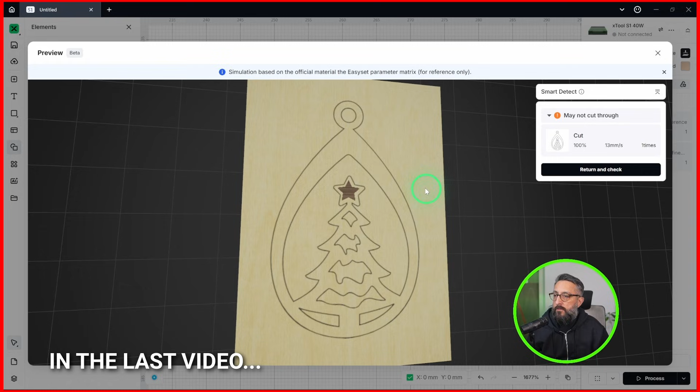In the last video, we walked through everything Studio gives you inside the software. That video was already getting a little too long because there's a lot to see and things in Studio keep changing so fast, so it was worth slowing down to show you what was new while it was still fresh. Give that a watch when you have a moment, because it sets the stage for what we're doing here today.

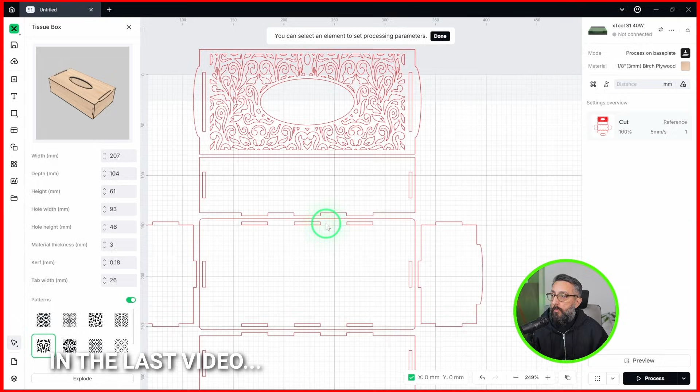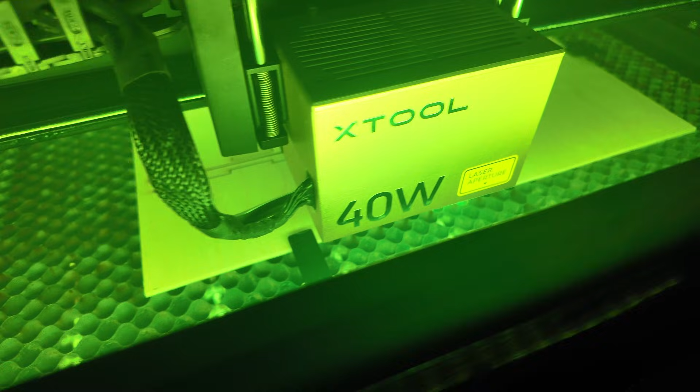As you can see, we're in the garage today. This is where the designs actually leave the screen and turn into real cuts. I'm going to take you through the full workflow from start to finish. We're going to prepare some plywood, measure twice of course, and then send everything to the laser. We're going to make a couple of products using the templates and taking the defaults, just so you can see how easy it is to go from there to the laser.

I will show you the treasure box, some of those keychains I made a couple of weeks ago, and prepare some ornaments and a quick tissue box. This is just to show you the variety of products in the studio, and also so you can see how quick things actually go. You will see how fast the design comes together once you plug in the numbers in the studio, and then we're gonna let the generators do the actual heavy lifting.

Let's get started. So I got my plywood ready. I'm just going to lightly sand with this sanding sponge here, just to make it look a little nicer. This is 3.2 millimeter Baltic birch, not the most straight. We'll see what we get out of it. We're just testing. Don't forget, never trust plywood. Use a digital caliper, whatever way you can to get a bit of an exact reading.

So for our purpose, I just wanted to show you how quick it is to make this product. This is what I'm calling a 5-minute product. You just go to the applications menu and then go to the box generator. That's simple. I know that I want to do the tissue paper. I'm basically going to take the default 3.2 millimeter thickness for the material. That's all I'm going to change.

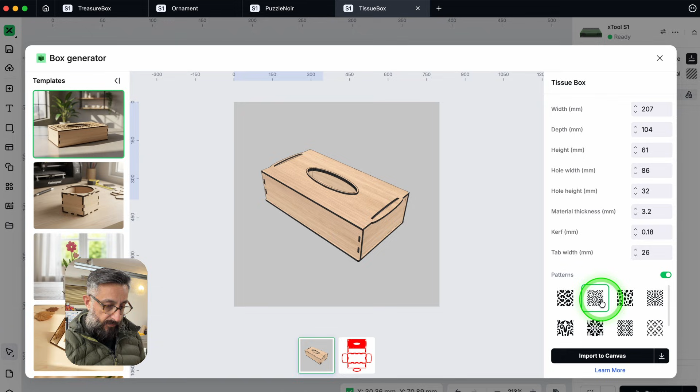I'm going to pick one of these guys for my design. I will import into the canvas. Remember, I can still change the design here within the canvas. We're going to close out of here, the tissue box template portion of things.

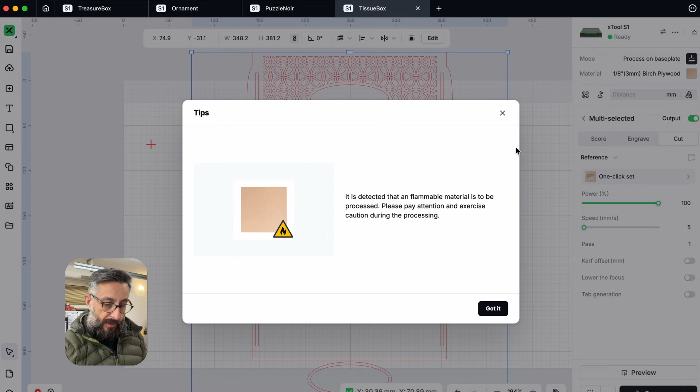As far as the cut, we're going to go with the 3 millimeter birch plywood, and then click apply. The system is smart enough to know I'm working with the S1, so it gives me its recommended settings, and that's basically it because all we're doing is cutting.

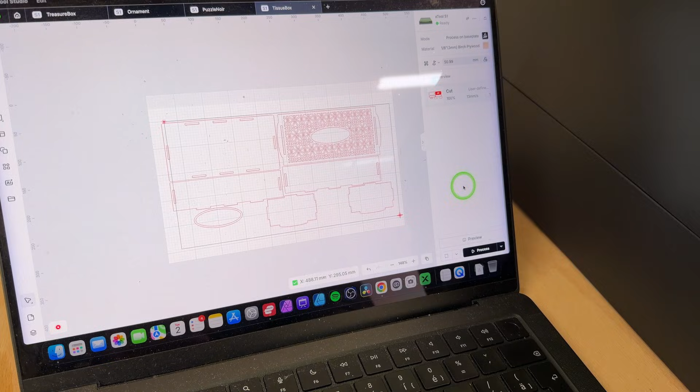So what we're going to do is set up the cuts, 1, 1, 3, and 3. This guy is 24.4 by 46.4. Let's see if we can film with one hand and set it up with the other. All right, so there it is. What is the estimate right now? 17 minutes. Now we have things centered.

Let's do our framing, let's see how we're doing. We're gonna check where those magnets are when it comes to the design. All right, I'm satisfied where things are going to cut. So 17 minutes, let's give it a try.

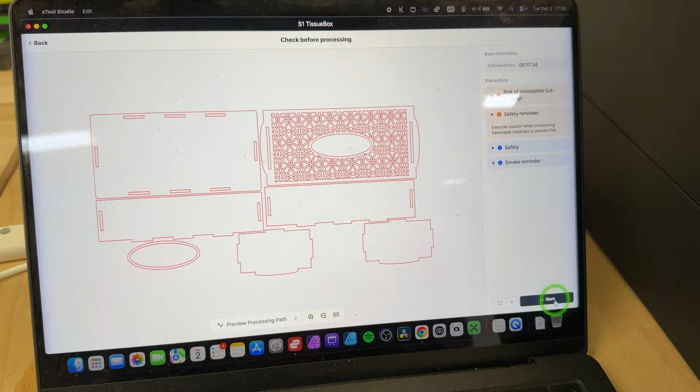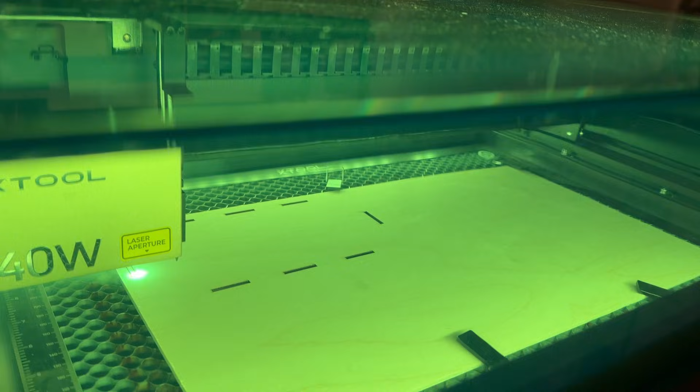A lot of smoke, as you can see. This plywood is probably not the best of qualities, but it works very well for my testings. Oh, that's nice. This was 5 when it came to speed, 100% power. Is it gonna hit the magnet?

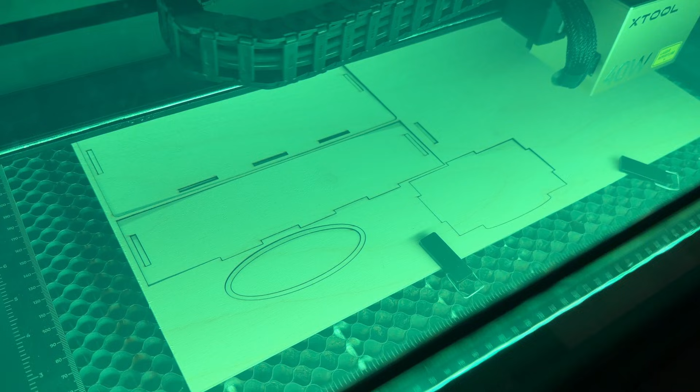Nope. All right, so what did we do? In a matter of minutes, just a couple of clicks here and there, you can technically design an entire box within Studio in just a couple of clicks. Of course, if you're going to customize it further, it will take you longer. But what we're trying to demonstrate here is if you need a quick gift, or if you need to sell something quick that you can customize quick, everything is quick. You go into Studio, a couple of clicks, and you're done.

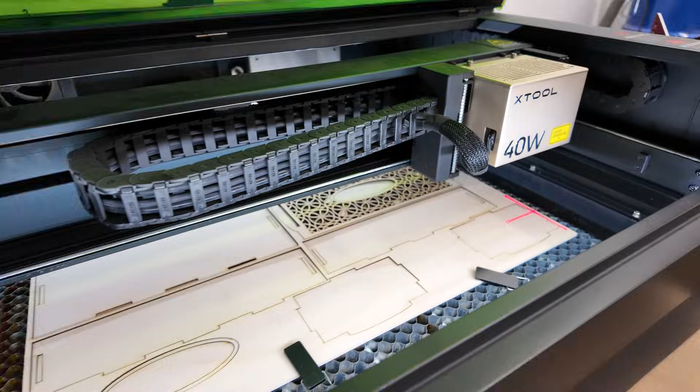Beautiful. Let's take a look. Look at that.

Of course, you should probably use some masking tape, and of course I should have done a bit of maintenance before cutting. All that will help you get nicer quality cuts.

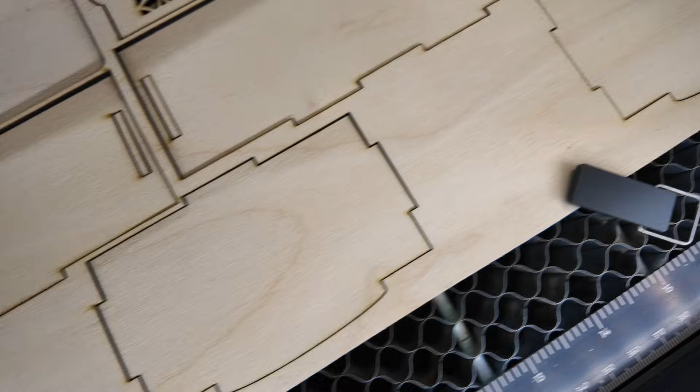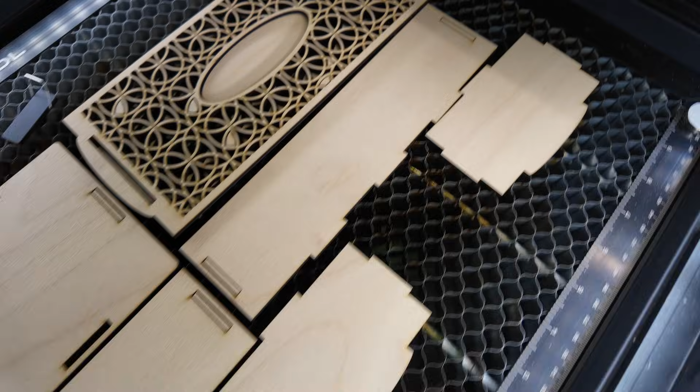The plywood not being the best, now you know why my honeycomb looks like it does. Whoa. So yes, that went pretty good.

Challenge is going to be putting it together. Do you have any tips as to how to glue this, put it together nicely? If you do, please let me know.

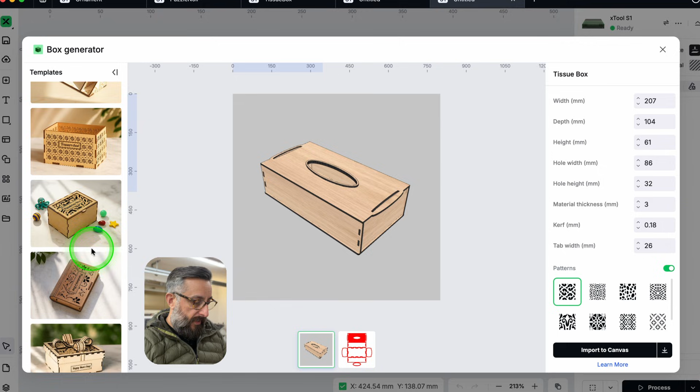Alrighty, so we're gonna go back to the applications menu, box generator. That's where we are going to live. We did the tissue box, and now we're going to make the one that they call the book box.

I really like this one. It's got a lot of patterns here, so you can see. I'm gonna go with the one that I eyed before. So we're gonna import it into the canvas. Just let me kind of place it there so you can see a little better.

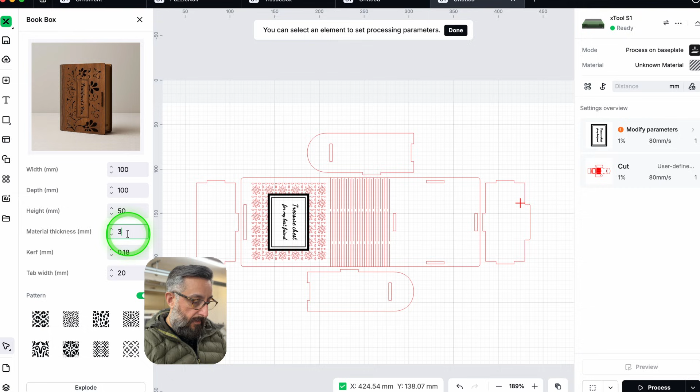We're just going to add the material thickness, which is the important part here. Right on the canvas, you can still make the changes you need. The book that they have in there, I couldn't find it in the templates. It looks really nice, would have been nice to have access to that particular book, but it's not there.

The great thing is that you can make this curve bending right out of the template. It's not going to be perfect, but it's a good starting point. If you want to perfect the cut or the bending, you've got to be more precise, but this is a good starting point.

Okay, we're going to do our next box. It was just a quick click, next type of thing. I didn't even add any engravings, I left the default, and the default reads: treasure chest for my best friend.

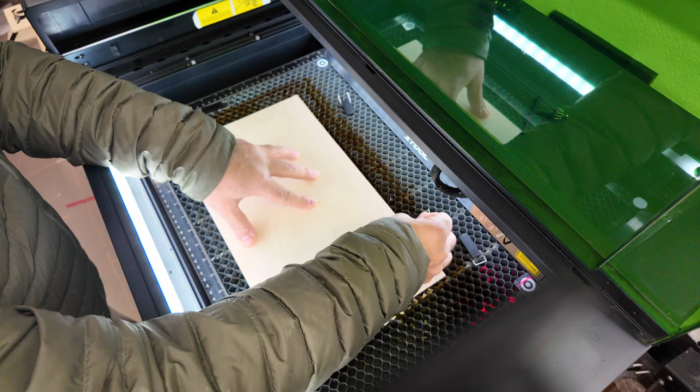We're going to place our plywood. As you can see, there's a little bit too much going on there. I'll take a look at the design, but my hope is that I can place these safely here and here. Let's see if that makes a difference. Sort of, kind of. Okay, so that wasn't too bad.

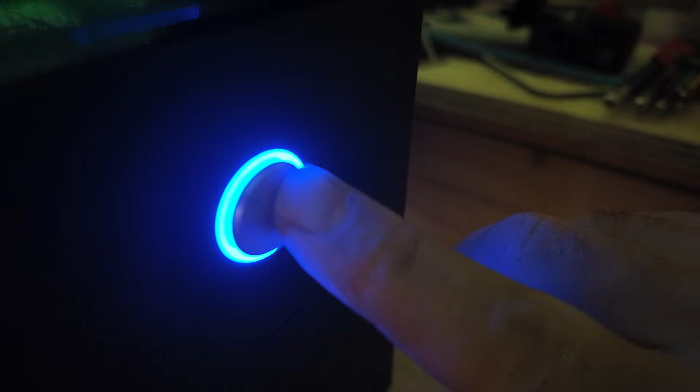Good, it says 21 minutes. Let's do this. So it starts with the engraving first.

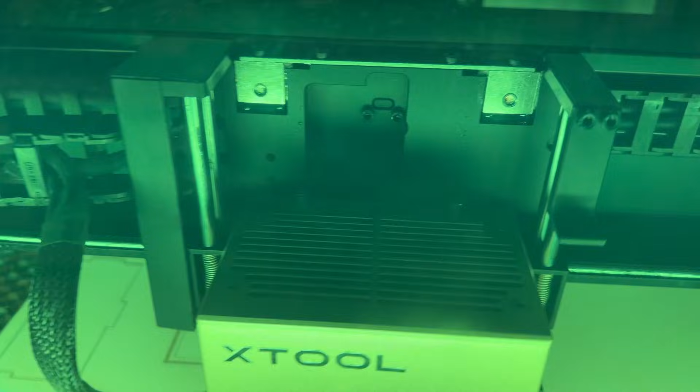We can turn the lights on. Oofa, alrighty.

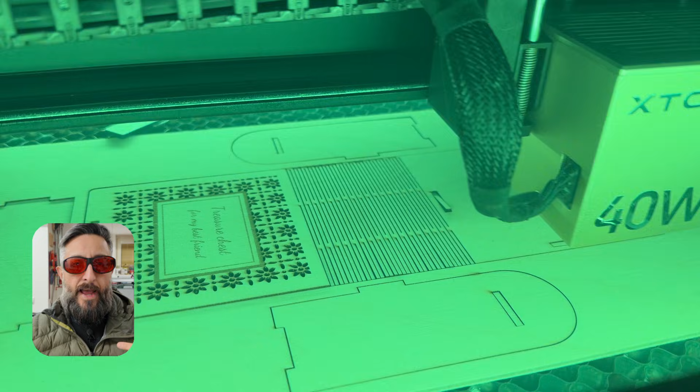What I'm very interested in knowing about this particular engraving and cutting of this box is that it has got that curve cut, right, that allows the plywood to bend. And I didn't have to set up anything, I just took the defaults. I'm just curious how that is going to work.

All right, the box is done. Let's take a look, what do you think? I'm very curious about this part.

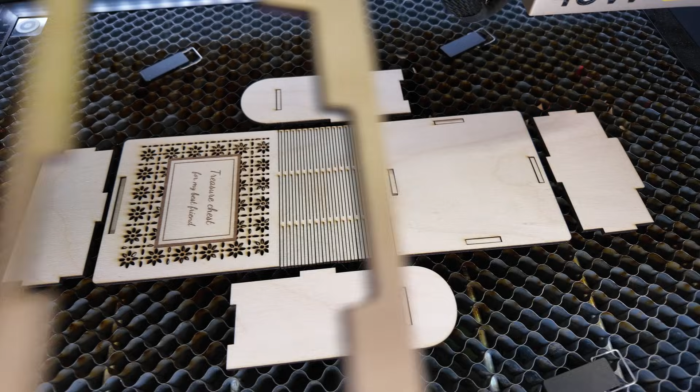It looks good, let's see what we can do now. Boy, I'm a little nervous. Very good, okay.

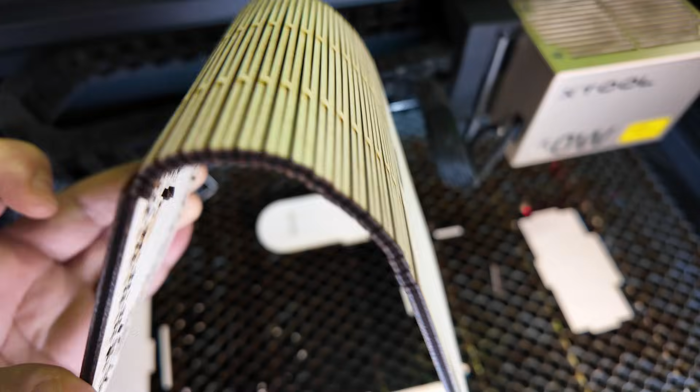Not bad, right? I see some little pieces still there. It's raining. All right, next.

So I went and got myself a couple more pieces of plywood. These are mostly offcuts, but all of them have potential, right? So we're going to put them to good use. Let's go.

For our puzzle, for the French noir, how do you say noir? We need about 100 by 100. Okay, that's not bad, so that's 10 centimeters.

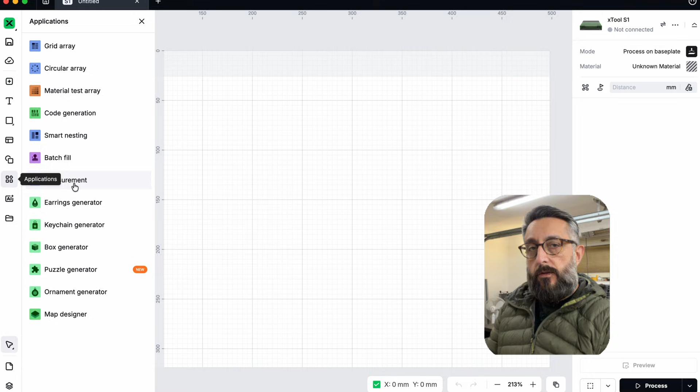So we're going to come here to the applications menu, and then we're going to go into the puzzle generator. In the puzzle generator, we're going to load our image. So there we have our picture.

Going to zoom it in, right? You zoom it in like this with the zoom. We'll see, that looks good there. So you can play with that zoom just to bring it in and out. We're going to try to center it a little bit horizontally. There it is, a little bit more in the middle. See how far I can go up without moving. Okay, just use this, it kind of goes a little faster. Seems, oof, a little too much.

As you can see here at the bottom, columns, rows, up and down. We're going to leave the columns and rows the same. If you change it, it makes it smaller or bigger. But I'm keeping the defaults on most of the stuff. Number of pieces, again, this makes it bigger or smaller.

More pieces, more you can deal with. We're just going to keep it at 20. And the tab size is those little tabs here, how big they are. Bring it back down, and we're just working on the rectangle shape.

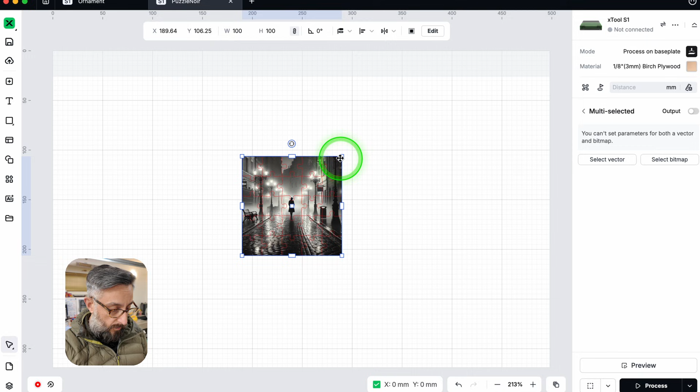Let's bring it to the canvas, right? So there it is, we're going to make it a little bigger. Let me see, 150 millimeters is 15 centimeters. Alrighty, this is ready to go. Let's give it a try.

So the actual cutting is going to take about 3 minutes, and the engraving is going to take about 28 minutes. So maybe I'll just shrink the engraving a little bit. Alrighty, I managed to bring it down to about 20 minutes. We'll see if it's going to be big enough just to test this. There goes 20 minutes.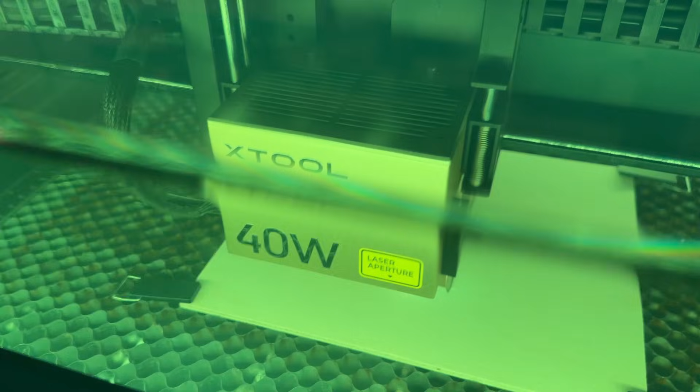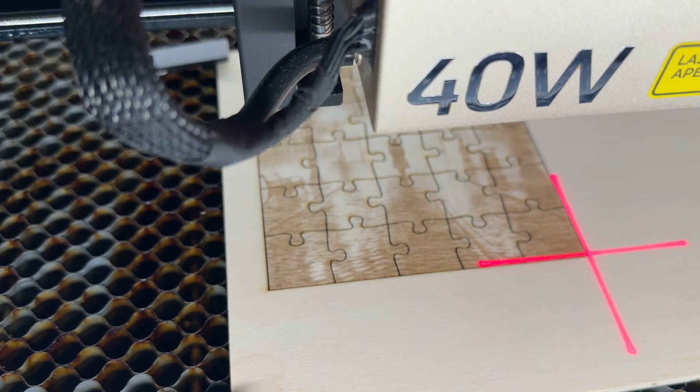What do you think? It's a small little puzzle, but it took a couple of clicks. I just gotta somehow get this out of the laser bed and put it on the table so I can show you the pictures. The picture could be a little darker, granted.

But listen, I just did a couple of clicks. You can play with the settings, you can do a lot more to reach that perfection, and I think this is pretty darn cool. Really cool. Alrighty, let's see how we do this.

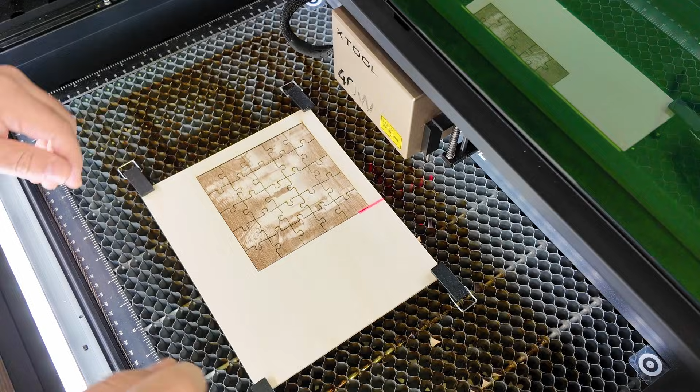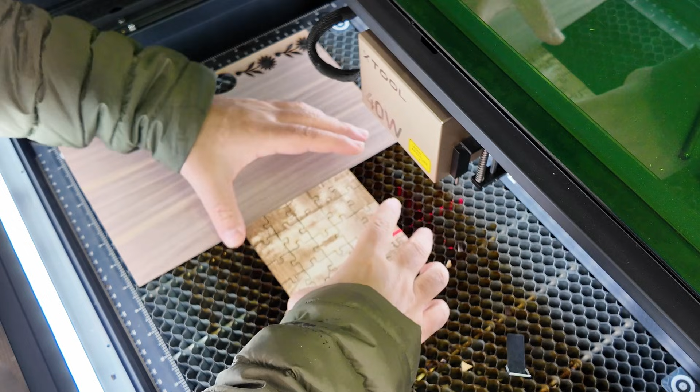Oh boy, alright, they're all good to go. Good, so it is a very small little puzzle, but I also don't feel like, oh boy. Alright, I managed sort of, kind of. Oh boy.

And the last guy, boy. Not 100%, the quality won't show very nicely, but it is pretty good for just a test.

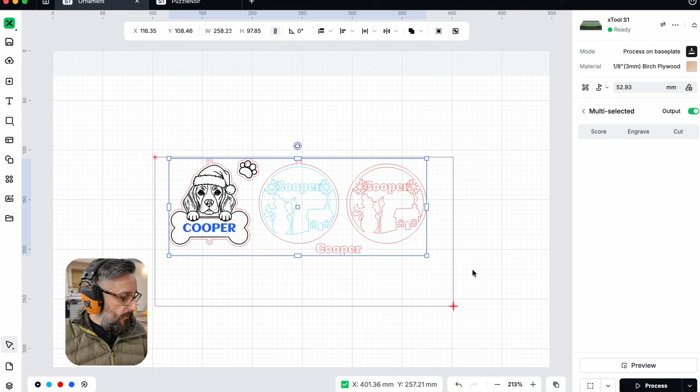So for the ornaments, we need about 25.8, so we got 30 here, and we said 97 millimeters, we got 15. This is going to be plenty. Yeah, we got plenty of real estate.

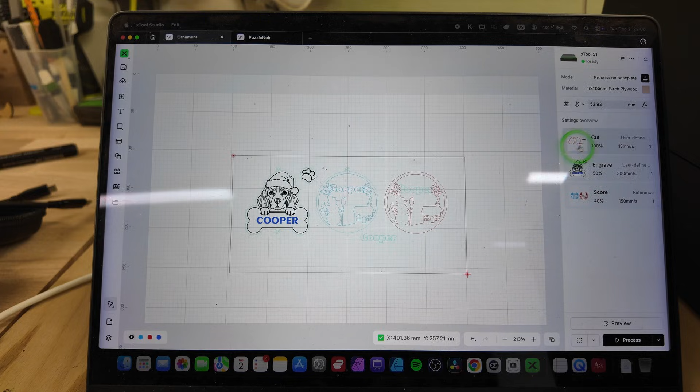I just want to make sure my magnets are out of the way, and we'll see how this one goes. All the cuts should be 100 and 13, and the engravings 50 and 300.

We're going to keep it at 100 lines per centimeter just because it's a test and we don't want to stay here very long. And the scoring—these ones are mainly just so we know where things are going to be placed, I think.

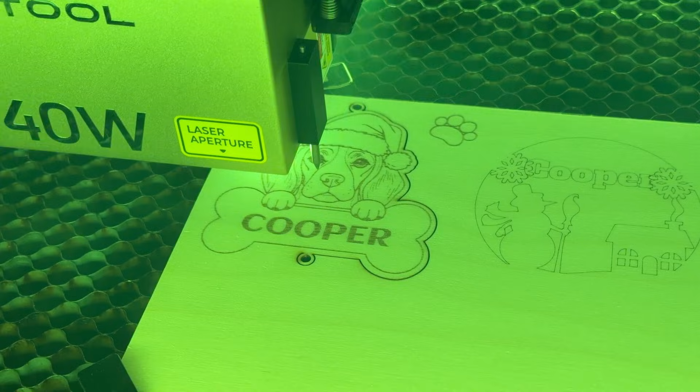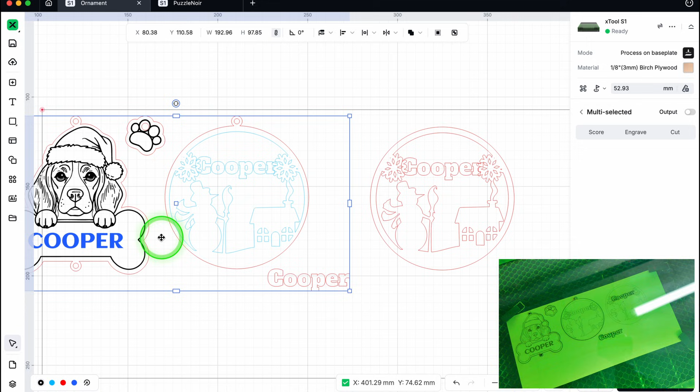So obviously there was something wrong here with this design. I went in and made some changes, and for some reason, instead of cutting, it was marking. Let me turn this off. That one on the far right marked, and I'm thinking that guy is supposed to be cutting. So I went back into Studio and changed it to cut. So let's get started, let's see.

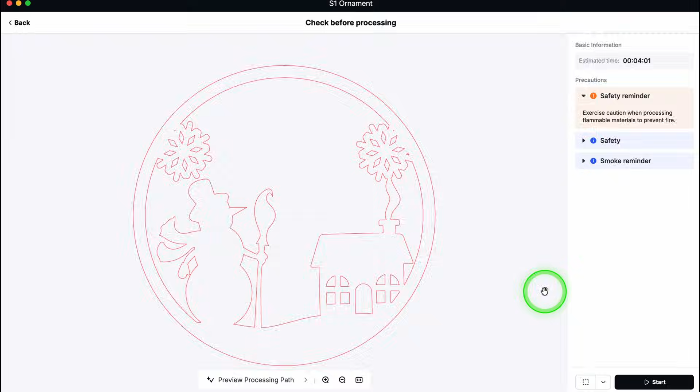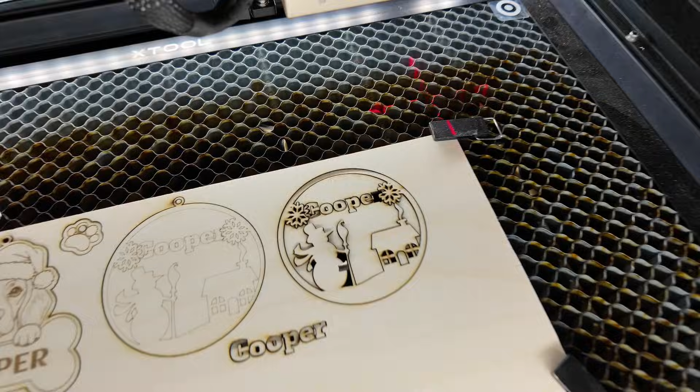So this just finished. Did some editing and just basically changed it to cut. And the letters here are supposed to be on top of that guy. So let's take a look how this will go.

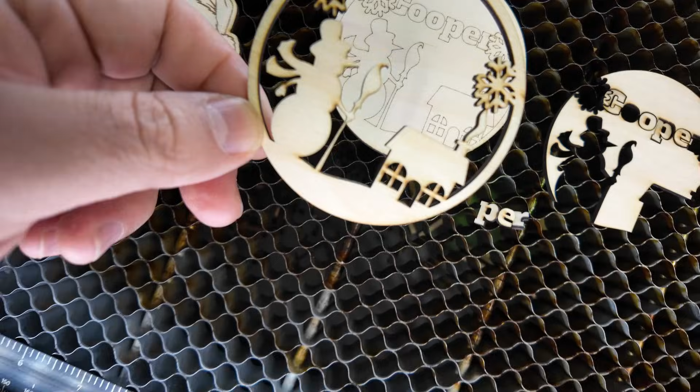Okay, so I'm missing one guy. All right, there he is. And I'm missing the O here. Oh no, it went down. Okay, this should go like this, right?

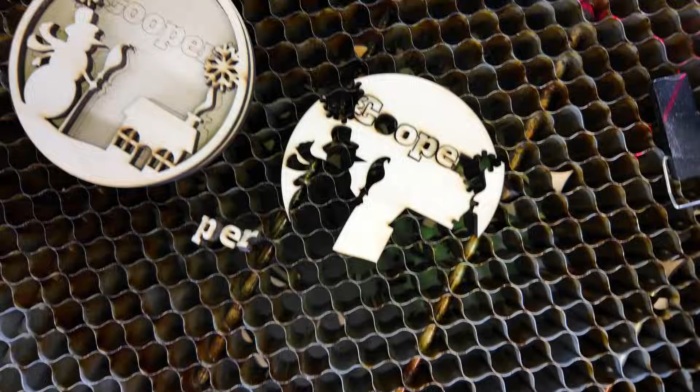That marking is so it can guide you, right? And then, oh boy, some of the letters went down there, right? Actually, I can probably use some of this stuff, but that's the idea, right? So I'm gonna go fishing for those letters.

This is the other guy here. Look at that, oh boy, a lot of charred piece of wood. There are my letters there somewhere. Here's what it looks like after a full day of cutting and engraving.

So you can see it took me a little while just to set it up, and it takes me no time to mess it up again. Now the yellowish tint is a natural thing that happens with the laser. Most people use some sort of masking tape. I didn't. In the past I have used acetone pads, alcohol, and my little Dremel. It works really well to get rid of some of these stains. This one is pretty straightforward, nothing really major.

Again, the point of all this is just how easy it is to make, right? This guy was great to make. I had my concerns because I was like, the fit is so tight, guys. So tight, there's no need for glue. This is basically from the honeycomb. So if you have the other style type of lasers, this would probably work a lot better for the inside.

Let me know in the comments, what do you think? These are the 5-minute gifts, like I said. Look at this puzzle, this little walker, right? I could go a little bit darker. What's great is just the pieces, the quality of the cut. Can do this with one hand. It's such a nice, tight fit, right?

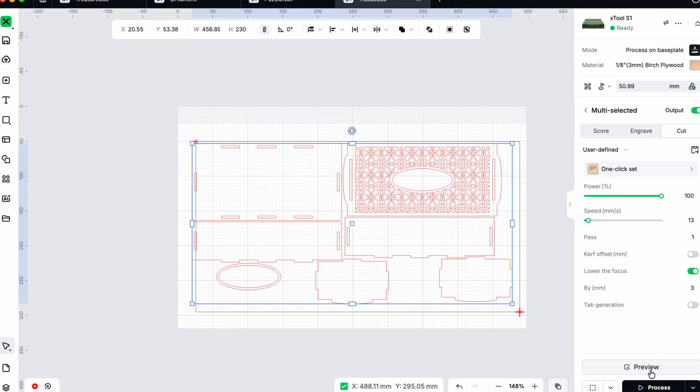Getting into the garage and actually cutting these designs is always a good reminder of what works on screen and what needs a little real-world adjustment. The templates did their job, but I knew that tissue box would never fit a real box of tissues. But you know, the defaults are a starting point, nothing more. And here's the thing, a third video was never part of the plan. But once I saw how the tissue box turned out, so good, with so much potential, I felt like I owe you a version that actually works. A box you can use, not just something that looks good in a video. So consider the next one a bonus video, built to give you a working template you can actually rely on.

In that final part, we're going to take the practical route. We will measure the tissue box the right way, bring those numbers into xTool Studio, and shape a design that truly fits. And yes, there will be a bit of trial and error and some educated guessing, which is normal around here. That is how real projects come together, right?